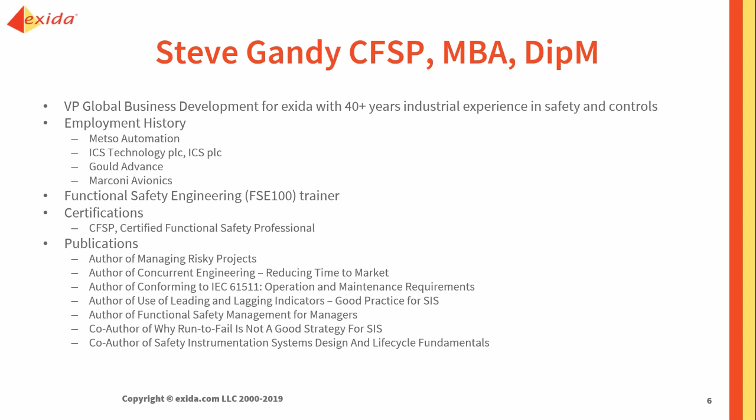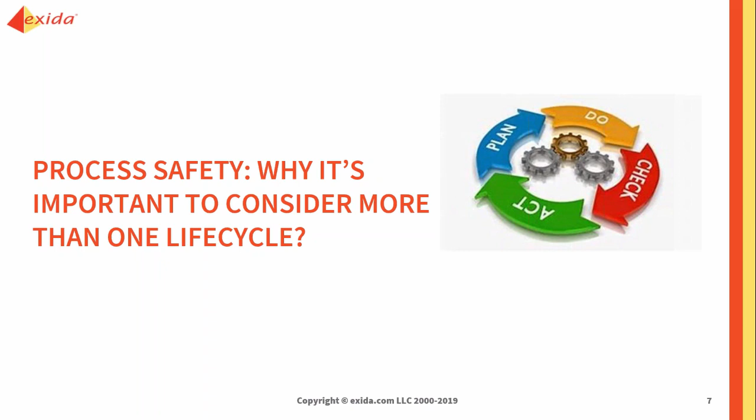So let's get down to the subject at hand. So, process safety, why is it important to consider more than one life cycle? Well, most of the time, if we just remind ourselves, people still get process safety confused with personnel safety, but process safety is all about dealing with things like toxic releases, explosions, and the fires that are associated with operating hazardous process plants.

And obviously the goal of process safety is to make sure that we can manufacture whatever product we need to manufacture as safely as possible. So obviously hazardous processes require some form of risk management to help prevent and/or mitigate the effects of having an incident, a loss of containment, an explosion, a fire, etc.

And unfortunately, as hard as we try, we still don't seem to be able to prevent accidents for a variety of reasons. So process safety is separate from personnel safety. Obviously, it involves personnel safety, but personnel safety refers to what's known as hard hat safety, the slips, trips and falls, whereas process safety is much greater in terms of the impact.

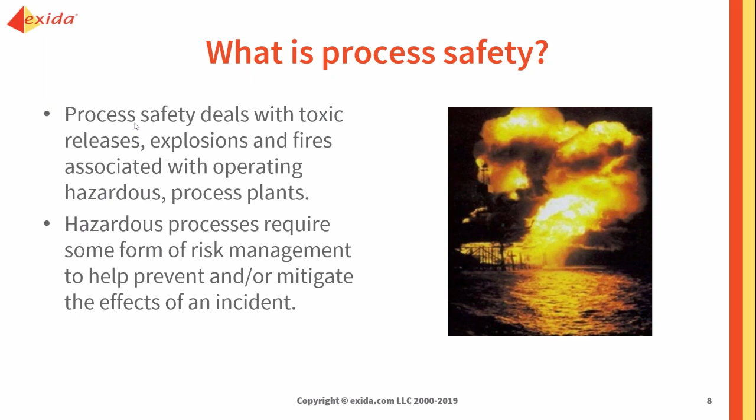So, having reminded ourselves of what process safety is all about, then we need to think about, okay, so we have to have some form of risk management. And again, as obvious as it may sound, why do companies manage risk? And very simply, companies manage risk because we have a legal, a moral, and a financial obligation to limit this risk that's posed by the operation.

Of course, from a moral point of view, we should make the plant as safe as possible, regardless of costs. The financial view, of course, is that we need to build the lowest cost plant and keep operating budget as small as possible and keep costs to a minimum to maximize availability, the uptime, and of course the profit. And then the legal side of things is that there are regulations that we need to comply with. Depending on where you are in the world, the regulations will be different, but similar.

For example, in the US, if you are a plant that stores more than 10,000 pounds of highly toxic, volatile or corrosive material, then you come under OSHA Process Safety Management, 29 CFR 1910, I should say. And then, of course, in the UK and Europe, there are COMAH regulations, and the HSE is very strict in the UK, and so they obviously define requirements as well.

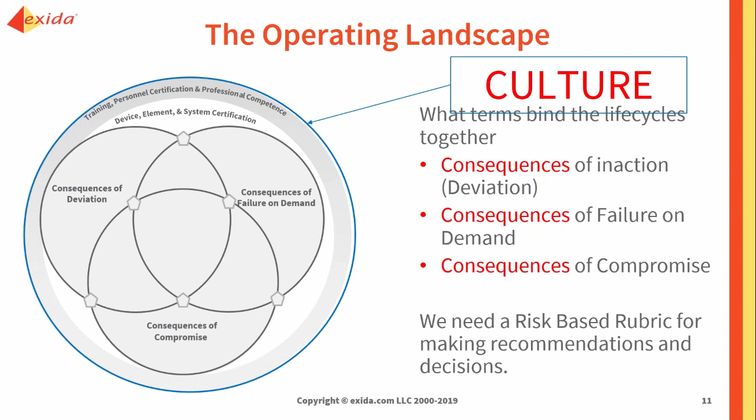62443 covers the industrial automation control system from a cybersecurity point of view. 61511 deals with the SIS and the cyber aspects associated with that. Of course, 61508 and 62443 deal with the device certification, so that if you have intelligent devices, you can have them certified not just from a safety perspective, but from a cybersecurity perspective. And then personnel, you could have personnel who are competent and they've been qualified. They're a CFSE, a certified functional safety expert, or they're a controls automation cybersecurity expert.

And then we have the alarm management, which is the IEC 62682 or the ISA 18.2. And then policies and procedures and tools. So these touch points are where we can make use of policies, procedures and tools to make sure that nothing falls between the cracks.

So the other point is that there needs to be a practical implementation of this, because again, we have to be successful on this, we have to have a thoughtful approach. And this is where we here at exida talk about taking a pragmatic approach. Because again, it has to be balanced with what the company is trying to achieve. What are the goals? Simply complying 100% doesn't guarantee reaching a particular goal. So you need to understand the overall structure and tailor these processes to meet the site needs and capabilities.

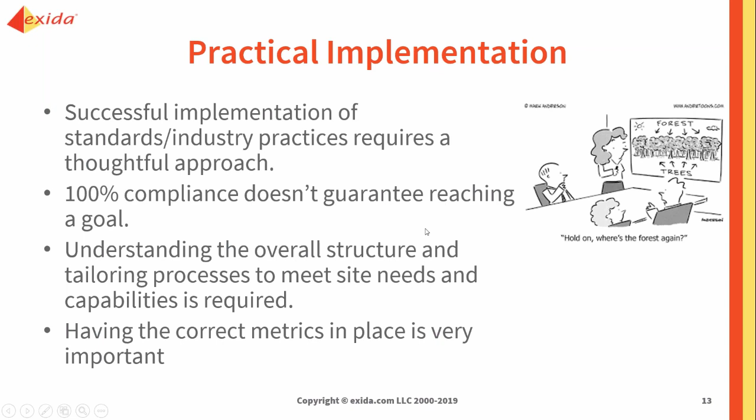And again, coming back to my point about culture, you've got to have the right culture. There needs to be buy-in from management to support these 3 life cycles if we're going to be successful in implementing process safety. This means that we need to develop an open and learning culture. In other words, we want to actively encourage people to learn from mistakes, not punish them. Learn from mistakes, but also have some autonomy so that if they think there's a potential for an unsafe process, they should have the authority to be able to shut things down.

So that takes a lot of faith in your employees and your staff and in your processes and procedures. But you've got to develop that open and learning culture so that people are not afraid to speak up, they're not afraid to take action. So that means doing things right and also doing the right things. This is what it comes down to.

So, for example, we have to make sure that our O&M people are properly trained and that they follow procedures. There have been several accidents where operators didn't follow startup procedures properly. So again, if they don't follow the procedures, there's no point in having the procedure. The procedure needs to be correct and it needs to be followed.

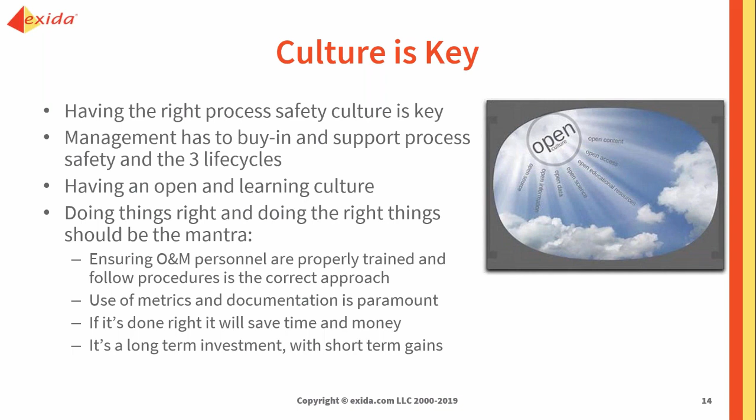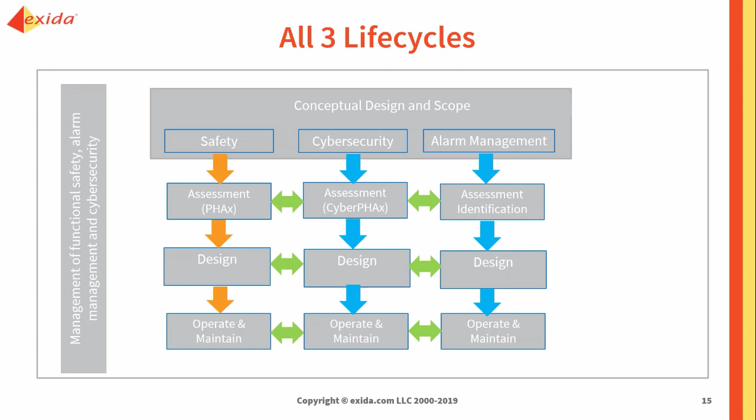So if we look at all 3 life cycles, we can see that they basically have the same 3 elements. There's some form of assessment phase for identification: the hazards from safety, the threats and vulnerabilities from cybersecurity, and the assessment of alarms from alarm management. Then there's a design phase to design a solution, and then operation and maintenance. So there are 3 common phases for each of these disciplines. And the glue that holds it all together is the management of functional safety, alarm management, and cybersecurity. So we need to make sure it's the usual: identify, plan, act, review, and adjust.

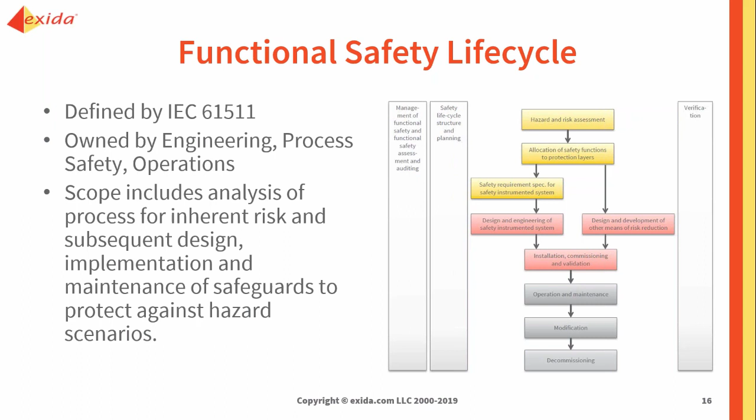So if we look at each one in turn, 61511 is owned by engineering, process safety, and operations. There are the 3 phases: the analysis phase, indicated by the yellow boxes, design and implementation or realization, indicated by the pinky red box, and operation and maintenance, the grey box. The scope in this case is the analysis of the process for inherent risk, and then the design, implementation and maintenance of safeguards to protect against the hazard scenarios. In other words, our safety instrumented system and our SIFs.

We come to cybersecurity, you can see the same thing. In the assessment phase, we're identifying where our potential vulnerabilities are and what the threats are. This requires cooperation between operational technology, OT, and information technology, IT. IT deals with the corporate-wide LANs and WANs, the email servers, the main data capture. And there's a difference between the priorities set by IT versus OT. IT looks at it as CIA: confidentiality first, integrity second, availability third, whereas OT looks at it as AIC.

They're more interested in availability to make sure that the system is operational. Then they're looking at integrity, and then finally confidentiality. So they're diametrically opposite from each other, but they have to work together as a team.

And so the scope here includes the assessment of the facility from the point of view of risk, and then the subsequent design, implementation, and maintenance to protect against those process and business risks due to the cyber. So the IT is going to be worrying about the business risks, the OT is going to be worrying about the process risks. And again, you can see the same three phases.

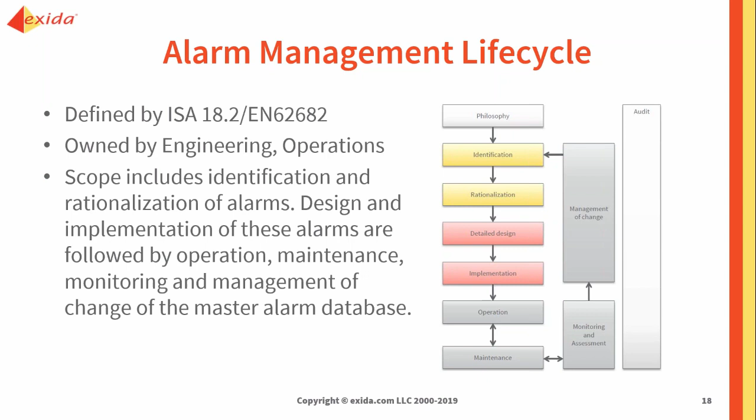So those three all come together. And the thing about these three is that they are performance-based standards. They're not prescriptive. So therefore, it means we need to be able to measure performance to see whether or not we're actually maintaining the original design parameters, and we're still achieving the amount of risk reduction that we were looking for. So we have to be able to measure the performance of all these three when applied to the SIS and BPCS applications.

So this means we need metrics or key performance indicators, KPIs. And one way of doing this is you can use leading and lagging indicators. Some of you may have attended the webinar I did on leading and lagging indicators, but if you didn't, it's recorded, so it's on the website. There's also a paper on it.

But essentially, lagging indicators are indicators of things that have already occurred. So if you've had incidents, near misses, trips, faults, etc., you should have those recorded. Because what we want to do from the lagging is be able to learn from that and reduce the occurrences if there have been.

The leading is looking at how often are we doing assessments, how often are we training our people, how often are we doing our testing and mechanical integrity, and are we doing it within the original requirements of the SRS, Safety Requirement Specification, or the CSRS, the Cybersecurity Requirement Specification, or the Alarm Management Requirements. So we need to choose those metrics that we can rely on and that will help us to prove whether we're meeting target or not.

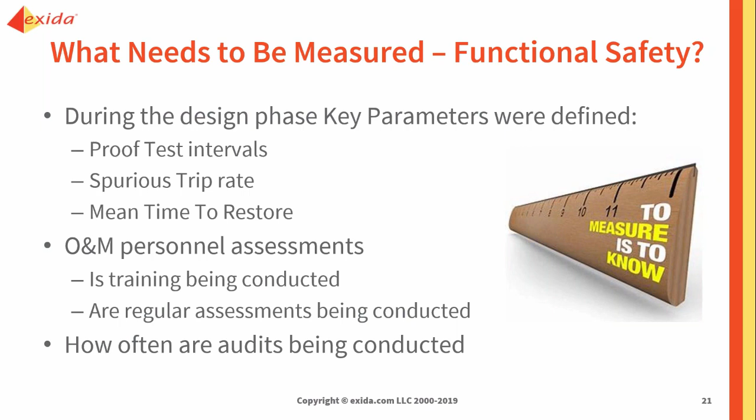So these are all things that are important to be measured, because the training and the audits are leading type indicators, because they'll give us an indication of if we're more or less likely to have an incident in the future. Obviously, if we're not training or doing assessments of our personnel, we run the risk of somebody making a mistake that causes an incident. If we're not doing audits, then we don't know if we're documenting everything properly, if we're following procedures like we should be, etc. And then these events need to be recorded. So any demands on the SIS, whether they're real or false, any incidents or near misses.

So of course, if relief valves go off, that's an indication that all is not well, and we should be looking at that and tracing that to root cause. Failures, both random and systematic. Those of you that have been on the course know that systematic is all about the 3 Ps, which is people. Are our people properly trained and competent? Otherwise, if they're not, they can make mistakes. And then procedures, are they following procedures correctly? And then the paperwork. Do we have a paper trail to show that we're doing all of this?

Proof testing. We need to record proof testing and the results of proof testing and make sure that we don't go outside of the period between proof tests of more than 10% at the time. So, for example, if the proof test interval was defined as being 18 months and it's taking us 24 months to get to the proof test, that will have a significant impact on the SIL for our SIFs. Repair and restore times, they need to be within the MTTR, the mean time to restore, specified in the SRS.

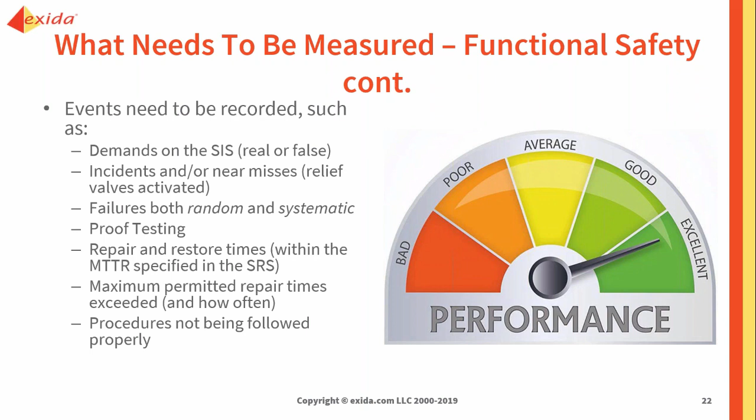Maximum permitted repair times. Again, 61511 requires us to define that so that if we're doing online repairs, we don't leave the SIF in bypass for more than a specified period of time. So, for example, if we've set our time as 72 hours, then we might say our maximum permitted repair time is 100 hours, allowing for delays in getting spares if they're not on site, etc. And of course, procedures not being followed properly. So these events would need to be recorded.

From a cybersecurity point of view, we would be looking at, have we had any incidents, whether they're accidental or deliberate? So most of the time, if the installation isn't an attractive target to an outside hacker, then it'll be internal, and the internal will be split between what we call the stumbling, fumbling, and bumbling, or deliberate. So the disgruntled employee. So again, if we've had incidents, we need to be recording those and then looking at how did they occur and how could we have prevented it.

We should be doing periodic vulnerability assessments. So it's not a once and done. You should be going back periodically to look at, okay, are our countermeasures still good? Do we have any new potential vulnerabilities? Have there been any policy violations? Because again, if you have policies and procedures, so for example, if there's a policy on not using portable media or not plugging in thumb drives, if somebody's doing that, then there needs to be some form of follow-up.

Are we doing training and personnel assessments? And if so, are we doing them within an acceptable period? How often are we patching and introducing antivirus updates? Are we doing that according to what we defined? Cybersecurity audits or assessments, are we carrying out these periodic reviews or for changes and updates? So all of those need to be recorded.

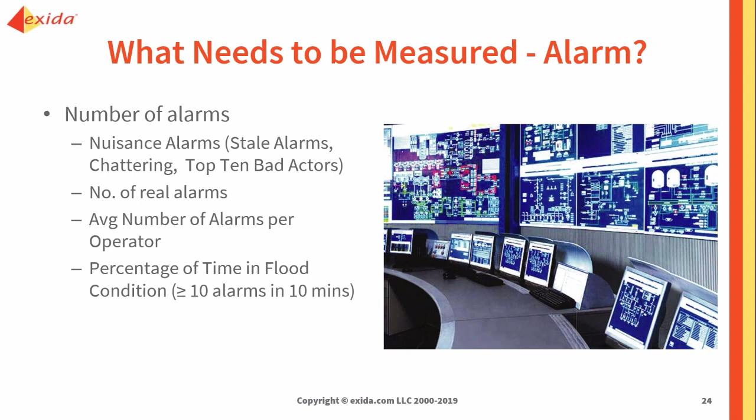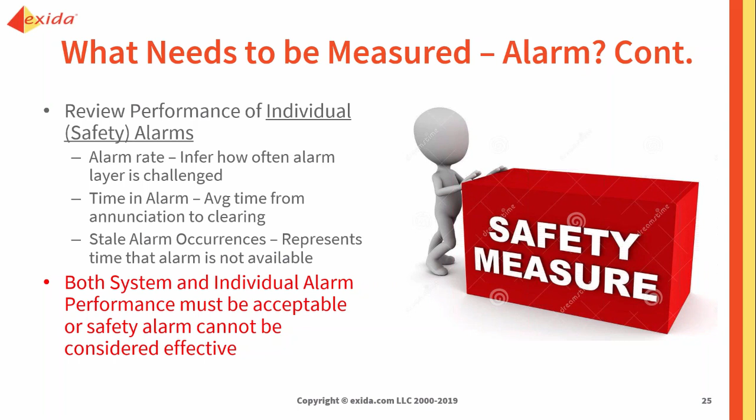And then if we look at putting it all together, there is a need to understand these interdependencies between functional safety, alarm management, and cybersecurity, because again, they're all potential risks if they're not done properly, and if we do them properly, they will help ensure process safety and risk is properly managed and maintained within these acceptable levels. So you need to understand the overlap and the interaction between the three life cycles. If we do that, we will be able to enhance performance and efficiency.

Having the right culture is vital, otherwise the success will not be guaranteed. And then making sure that we have the right set of metrics for each of the three to be able to measure and assess performance is very important, because otherwise we won't know whether we're achieving the goals that we set.

So from the cyber point of view, do we have the right countermeasures? Are they being effective? And then from the safety point of view, of course, are we doing the testing correctly, and is it effective? And from the alarm point of view as well.

So we need to also think about how often employee competency assessments need to be done. And again, having an employee that knows alarm, cyber, and functional safety may be a bit of a stretch. So you may have different employees, but they do need to have their competency regularly assessed, or at least they need to be assessed to make sure they know what they're doing.